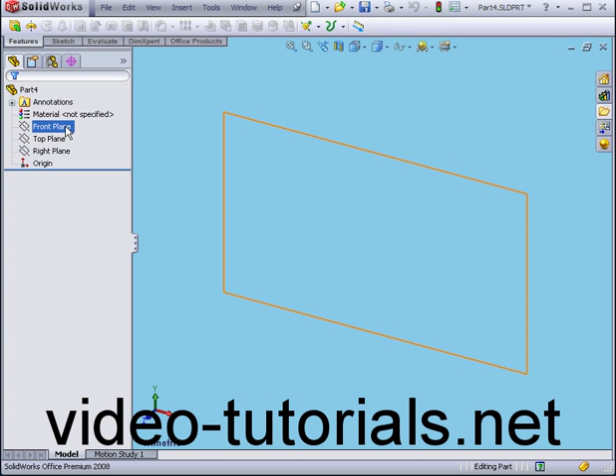First, I'm going to right-click, select Insert Sketch. Now let's activate the Line tool. And let's create a shape. Right-click, select. Let's use the 3-point arc tool now. Something like this. Right-click and select.

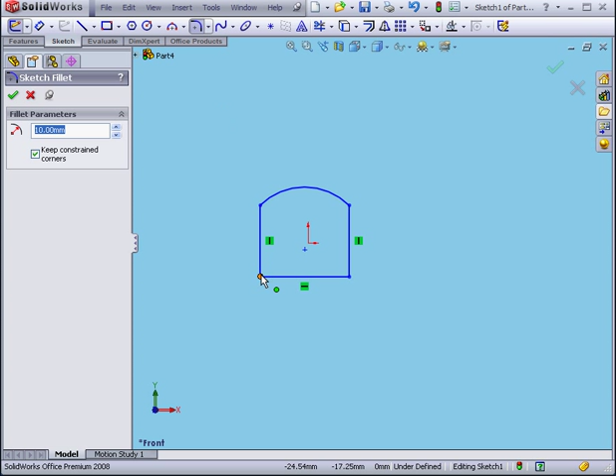Now let's apply some sketch fillets. A 10 mm radius will be fine. Let's accept. Now let's use the rectangle tool to create a rectangle. Under Options, let's check For Construction. Click OK.

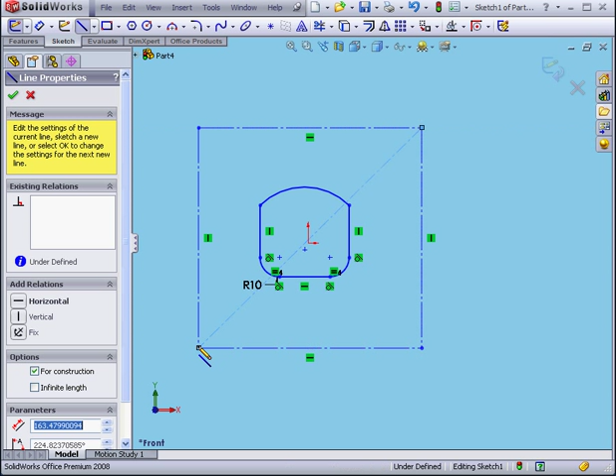Activate the Center Line command. Let's create a construction line between these two corners. Right-click, select. Next, Control-select the center point and the center line. We'll add a midpoint relation. Click OK. The origin point is now located at the center of the rectangle.

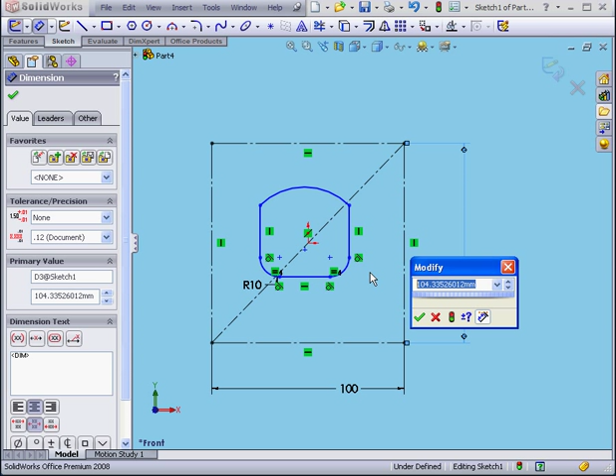Now we're going to apply some dimensions. This dimension will be, let's say, 100 millimeters. We'll make this one 120. Now let's Control-select this line, and we'll add a collinear relation.

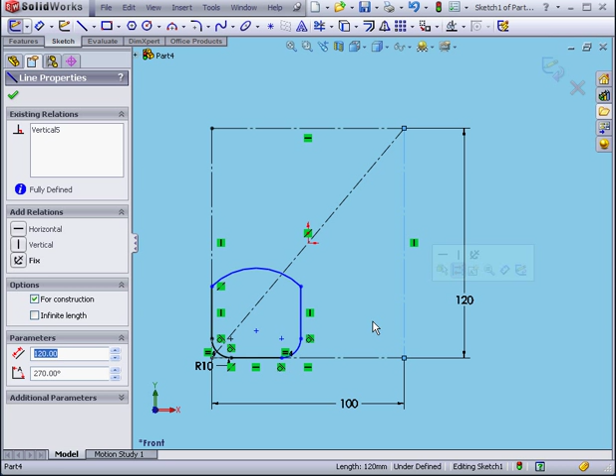Click OK. This line, and Control-select this line. Collinear. OK. This line, Control-select this line. Again, a collinear relation. OK. Now we'll select the arc and this line. We'll add a tangent relation. Click OK.

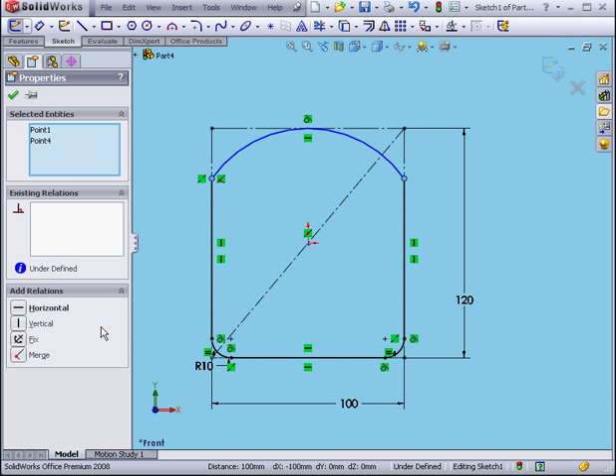Control-select these 2 points. Add a horizontal relation. OK. Let's add one more dimension. We'll make this 95 millimeters. Tab OK. Right-click and select. You see in this case that the construction geometry helped us fully define the sketch and also helped us to see how the geometric relations in the sketch were created.

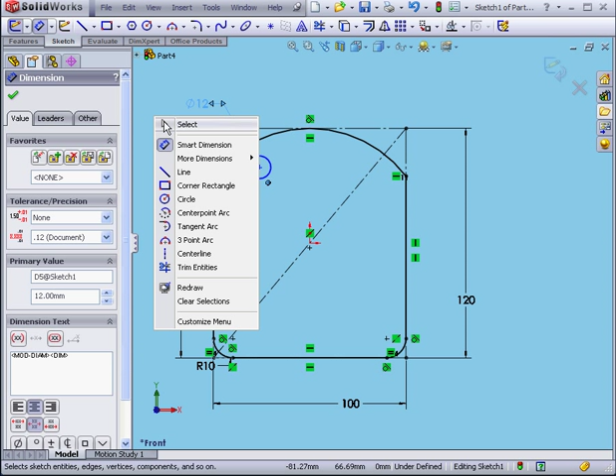Okay, let's create a circle. Right-click, select. Let's dimension our circle. We'll give it a 12 millimeter diameter. Okay. Right-click, select. Let's use the Center Line command again. Right-click, select.

And let's dimension it. We'll insert an angular dimension here. 112 degrees. OK. Right-click, select. Now let's Control-select this line and the center of the circle. Let's add a coincident relation. Click OK. Let's add one more dimension from the center of the circle to the origin point.

You see here that the dimension moves based on where my mouse is hovering. When you're satisfied with the dimension's orientation, right-click, and the dimension becomes locked. You'll see the lock sign on the mouse. If you want to unlock the dimension, just right-click again and the dimension becomes unlocked.

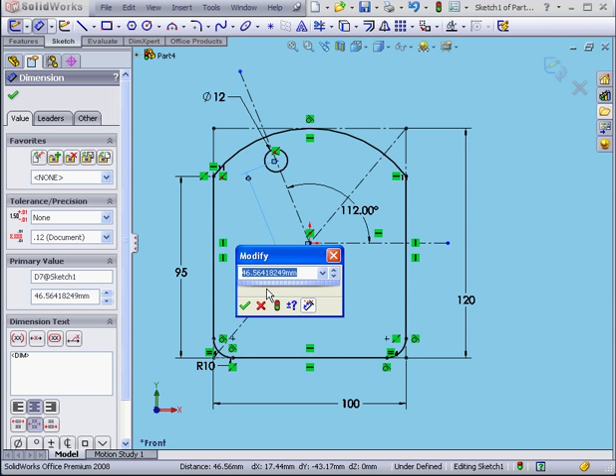Again, let's right-click. And left-click when you're satisfied with the position of the dimension. Let's enter 45. OK. Right-click, select. Now let's delete this angular dimension. Activate the Point tool. Let's drop a point right about here.

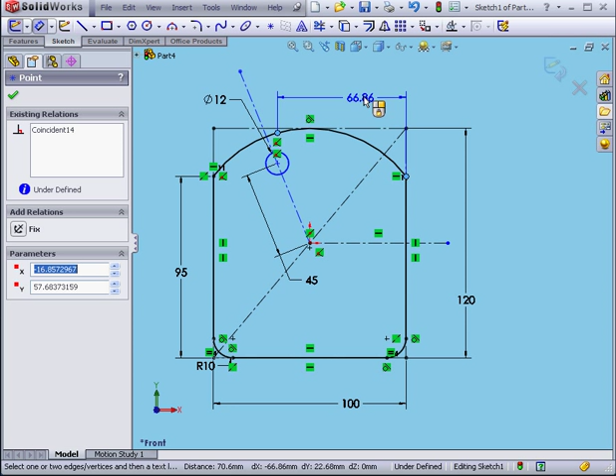Right-click, select. Let's say I want the position of this construction line to be driven by the distance along this line from this point. Let's activate the Smart Dimension tool. Select this point, and to create a dimension along this line, select this line. Left click. Let's say the distance is 75 millimeters.

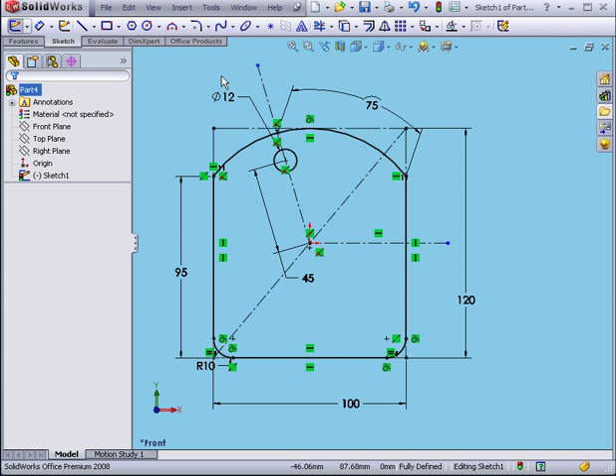OK. Right click, select. Now I'll control select this point and this line. Add a coincident relation. OK. This is another example of how to use construction geometry to constrain and better visually understand your sketch. Let's exit the sketch.

Activate the extrude tool. Something like 3 millimeters. OK. This concludes our tutorial on using construction geometry.